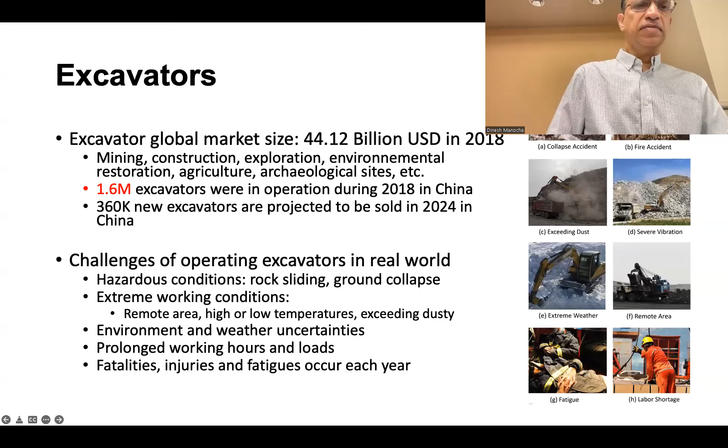So the notion of an autonomous excavator is not new. We were not the first ones to do it. There were at least previous systems. One of the earliest systems was at Carnegie Mellon at NREC way back in the late 90s. You can see the autonomous loading system. There's some really good work even at ETH. There's a lot of work on earth moving equipment. Moving stuff around is not a novel idea. It has been around for a while. We go from there. And there's a lot of work happening there.

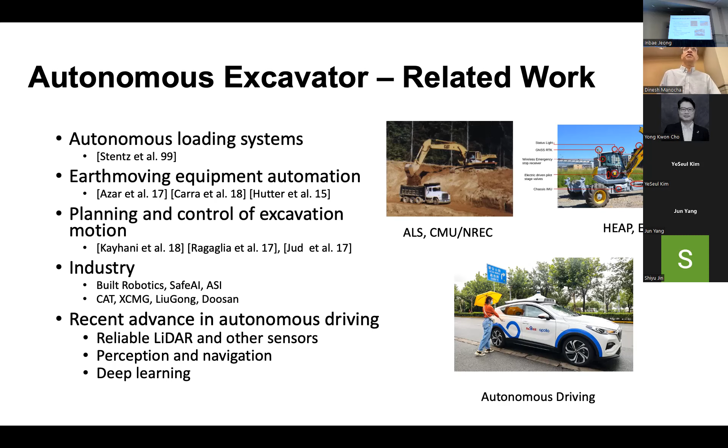I would say there's a lot of boost coming in the last decade because a lot of investment has gone into autonomous driving. If you see some recent media articles, the venture companies or the big firms have spent close to $15 billion. So as part of the autonomous driving industry, there have been a lot of developments in better LiDARs, better cameras, and of course, a lot of investment in perception and planning for navigation. So a lot of the technology invested in autonomous driving, we can leverage here and do well.

So this was a system that we put together. It's a large team at Baidu Research led by Liangjun himself. But you can see, you take an excavator and all kinds of sensing come in. There's a camera, there's a LiDAR, there's a pressure sensor, inclination sensors. And you have to make sure, when they're on heavy excavators, it's reliable. There's a lot of vibration, there's a lot of force being applied, and you go around.

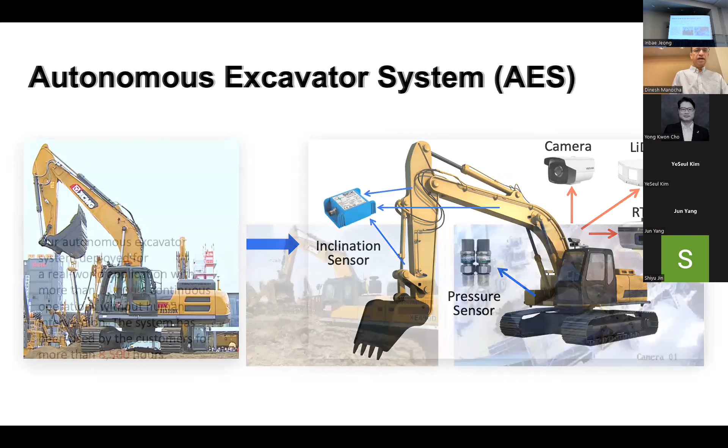As I said, the idea of excavation is not new, but the take-home message I want to give from this talk is that the real challenge in this work is actually integration. There's a lot of work on perception, planning, control. As an academic, I myself write a lot of papers on that, but what you don't realize is how do you make planning, perception, and control work together? And how do you reach a level of reliability?

There were hundreds and hundreds of engineering challenges solved, which I can't talk about in 15 minutes, and we could not put in the paper, but literally what this was able to demonstrate, which I hope was a big thing, is that the efficiency was close to human operation.

About 80, 90%, 95% getting better and better compared to humans. Robustness, it's operating—you saw a big, small video there, but this has actually been deployed in a site where it worked 24 hours nonstop. This is really 24 hours, not a staged thing. This particular user has used it for more than 8,500 hours. We hope this metric shows it can work 24 hours nonstop, achieving close to human-level efficiency. Humans are really good operators at how you do the thing and reach that goal. So this is really deployed, it's no longer a proof of concept, it's really being used and people are literally benefiting from it day to day.

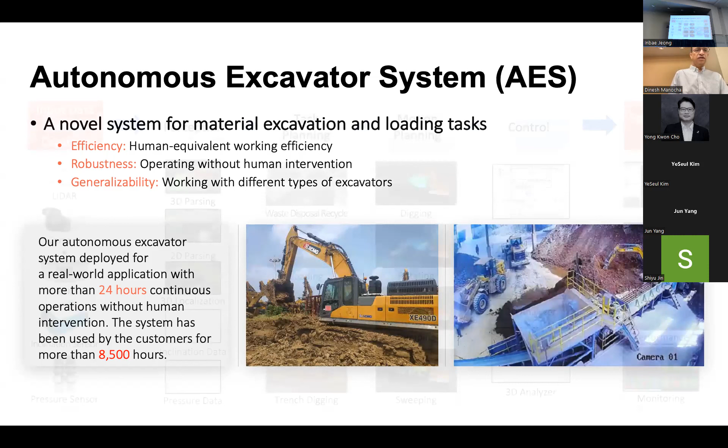So what are the components? Any of these autonomous systems, just like autonomous driving, has 3 big high-level parts: perception, planning, control. This pipeline is not new, it's been around. Now perception got a big boost from computer vision—last 10 years, deep learning has totally revolutionized it. Secondly, the number of sensors, the number of LiDARs and cameras coming around. So perception came to a big level here, and you can see the multiple sensors here.

In planning, we always talk about breaking it down into high-level and low-level planning. High level is task-level planning—you give high-level tasks, like an operator says I want to deal with loading, I want to deal with rock removal, trench digging, or waste disposal recycling. You take that high-level task and break it down into what we call classical robotic motion planning: a series of motion planning problems like digging, rotating, dumping, sweeping. So you can imagine building a low-level library of motion planning modules and a high-level task library.

And of course control—you have to have hydraulic motors or other mechanical parts, and they have to work at a really high level. Of course there were lots of challenges. You use as much open source software as possible, but a lot of software has to come together. I want to emphasize that level of integration was definitely non-trivial. This is the challenge every automation system faces, what every vendor of autonomous driving systems deals with—they've got a large team to work on and put it together.

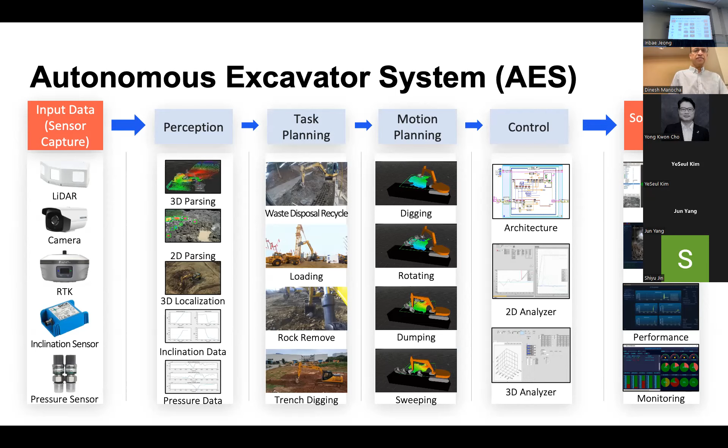Let me give you examples of the perception challenges we deal with, in the perception pipeline. When you're in a construction site, you're dealing with a lot of dust and rocks flying around. Even this projector looks hazy, but in a construction site the scene is always full of haze and dust. So we had to develop a new pipeline for what's called de-dusting, for lack of a better word. You see lots of papers in computer vision and robotics covering all kinds of perception, but there wasn't much work on de-dusting—not many people dealing with it. So we had to gather our own data and train our network to get it right.

What kind of material is it—is it hard soil, is it rock? That comes up in semantic segmentation: you'll see this is where the rock is, this is where the water is, this is where the grass is, and so on. And instance segmentation. Finally, for the actual operation where you pick up rocks, you have to figure out the 6-DOF pose estimation, what pose to take. This will become clearer in the pipeline.

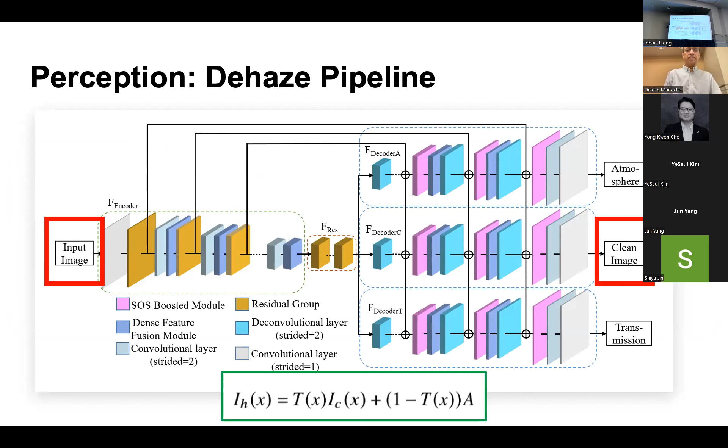I won't go into the details—it's in the paper—just a network showing the de-dusting pipeline, the dehazing or de-dusting. You give an input image and this whole pipeline of networks processes it. Let me show you how this works; I'll spare the network details for lack of time. But literally, this is how the input looks like—of course it looks even worse on the projector than it did on my laptop, so you can barely see anything.

So let me see if we can turn the lights off. Maybe slightly—the projector isn't very focused, I think. So we need a better focusing projector, deep learning in the projector right here, right? Can we turn the lights off by any chance? Anybody have luck on that?

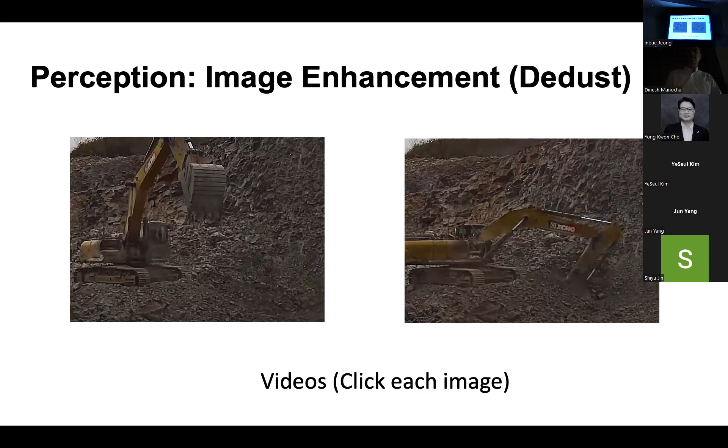Okay, so this is it. This is what I call the fuzzy version. You can see it's a little bit sharper with de-dusting, same thing on the right-hand side. This was one of the first perception modules. When we started working on this project three years ago, we did not expect this. This is one of the biggest challenges in the process, dealing with lots of fuzzy, flying dust, and how you deal with it. At the top are the dusty images, and on the bottom are the results of the network, de-dusting, for lack of a better word, or just better focus, so you can do better recognition on these things.

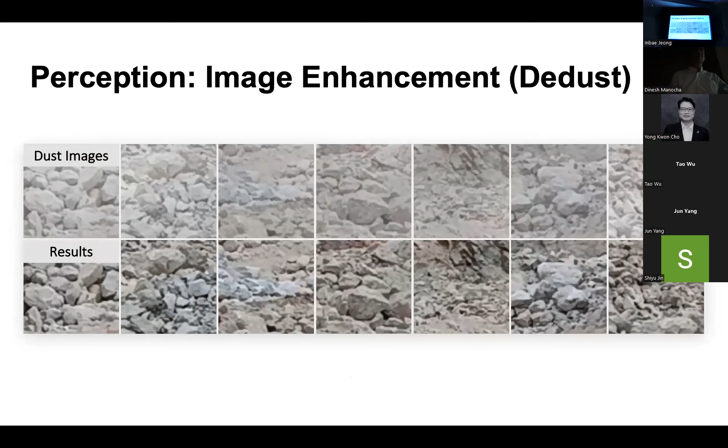Running segmentation on the top row would not work as well as segmentation on the bottom row right here.

Of course, to get the perception right, we have to build our own dataset, because deep learning only works well if you have good labeled data. We generated datasets taking into account 8 classes, from dry soil, wet soil, all the way to titanium and mixture. This isn't exclusive—you could have construction sites with more than 8 materials, but we can train it accordingly. This can definitely handle that.

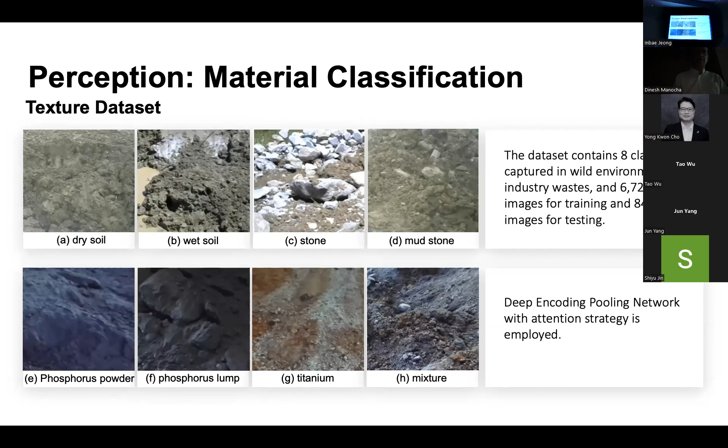To get a good dataset that works well, we took almost 6,700 images for training and 800 for testing, the typical breakdown in deep learning methods of 80-20 or 90-10 for testing and training, building a database. We found that using an attention strategy with a deep encoding network worked well, so we got pretty good results once the database was there and the network was trained.

And I said the other part was segmentation. Last but not least, you've got big stones, big items to lift—how do you deal with them? You figure out the pose of the stone. If you see a large rock, how do you go about it? Humans can figure out how to put the manipulator at the head end, but in this case...

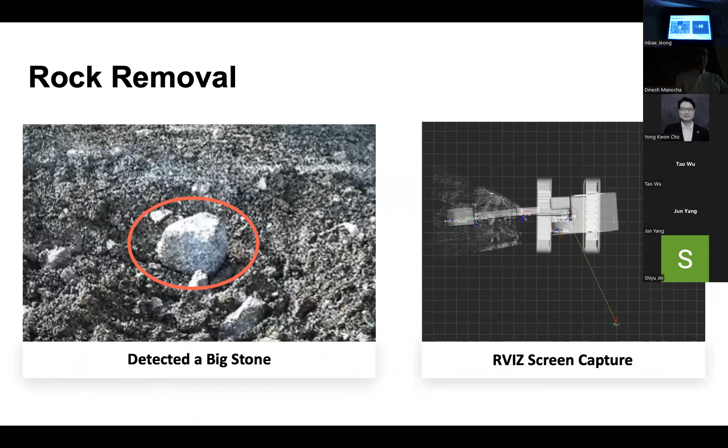Everything has been done automatically. This is just an example of how rock removal works—you detect it, and you'll see how the excavator comes and literally lifts it up. This is automatically done to figure out the whole pose, what angle it should come at, what force it should come down with, and lift it up. So this is kind of the operation.

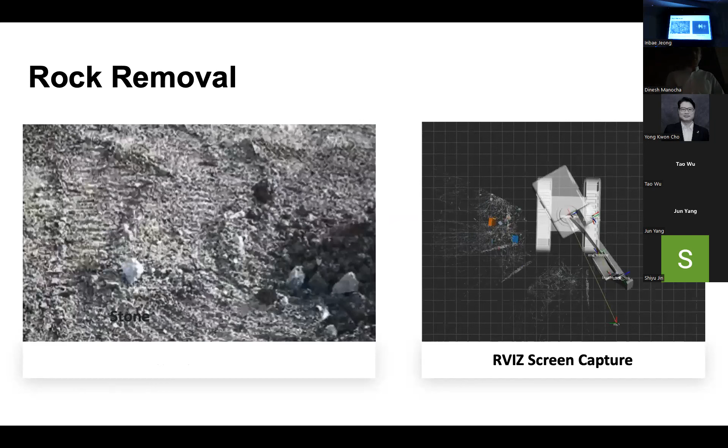On the left was the actual simulation, the actual excavator. On the right-hand side, you see the screen capture from the actual system.

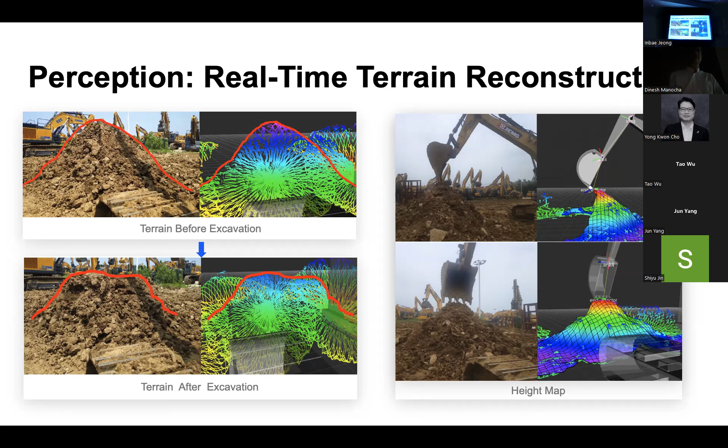This is it. As we heard this morning, on a construction site things change every half hour, right? It's 24/7 operation, digging going around. So if you're running an excavator for 24 hours doing a big waste disposal job, the terrain is changing very frequently. So you need what's called real-time terrain reconstruction, which typically vision people don't do. But construction has this challenge—the site you're operating on changes very frequently, as mentioned by the morning speaker—so you need real-time capabilities for doing this computation.

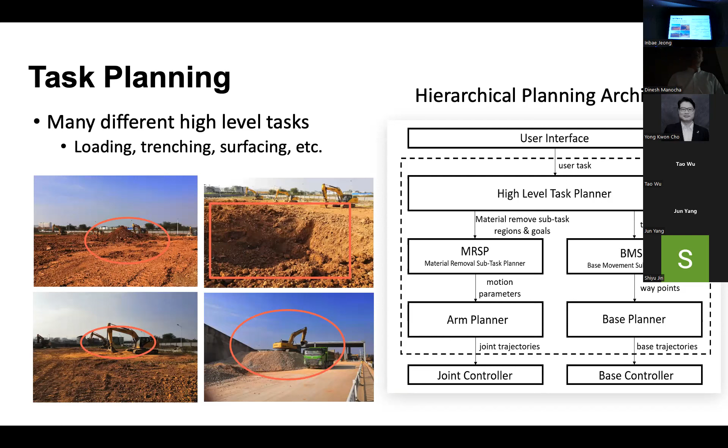This high-level task planning and low-level motion planning—the hierarchical planner we put together, what you see on the right-hand side, took a lot of components together. These are well-known techniques like MRSP based on material removal, and BMSP, a sampling-based planner. This whole planner was put together by taking a lot of technology that the robotics community developed over the last 40 years and putting it together here. Especially for the low-level planning, we use optimization-based planning, which has been around.

There was earlier work on CHOMP and STOMP. My own group at UNC did a lot of work on ITOMP. There are a whole bunch of planners, optimization methods, and we specialize it here to see what comes up.

Optimization cost depends on making sure it respects joint limits, takes into account collision cost, and final goal state cost, and makes sure there's no collision. So you set up an optimization function, following a gradient descent method. In this case, we use what is called stochastic optimization.

Of course, the optimization method is susceptible to how good an initial guess you take. So if the initial trajectory is good, you basically get good convergence. In this case, we know the task we're doing, so we're able to optimize that.

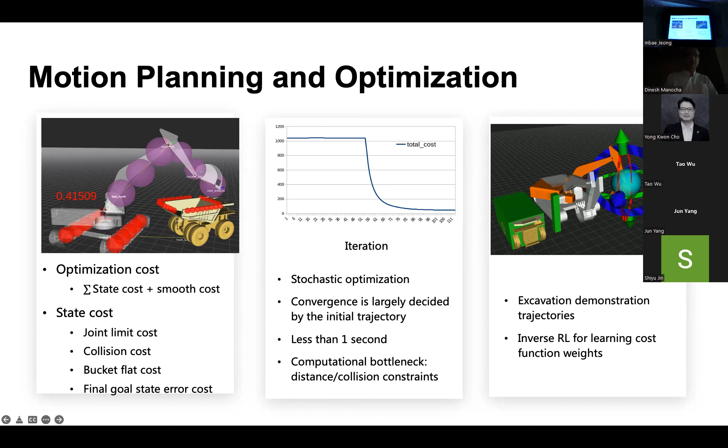The good thing is it's pretty real time, at least it's getting fast. It was not the biggest bottleneck, though of course you can always make it faster. So this is the thing, but this is exactly what you'll see.

On the left, you see the excavator with a human operating it. You can see in slow motion how it opens up the head and literally digs it up. On the right-hand side is our autonomous system working in real time automatically, getting close to human efficiency. Of course, humans are humans, but the automation system is getting there.

Overall, we got pretty close to human efficiency, and our goal is that as you deploy it more, it gets better. It'll be good to compare the nodes in five years. Could we do better than a human, right? Especially if you're operating for 8 hours. This is going to be a nice automation versus human performance comparison, though we don't have to get into that kind of a race, but we're getting pretty close to it already.

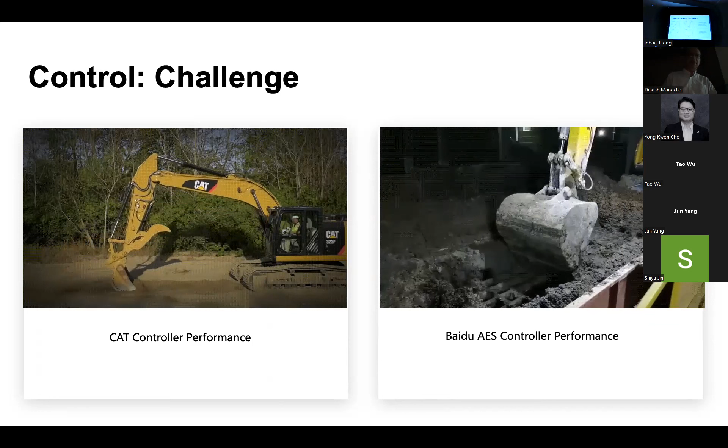Now, here are some trajectory controllers. In the controller, the big challenge was there are different kinds of excavators, light and heavy. You don't need to worry about that part.

The motion control in the hydraulic actuator was a very big challenge. I won't go into details, but a lot of effort was done to make sure the controller can follow the planned trajectory to about 10 centimeter accuracy. This is a pretty big scale, and getting this kind of accuracy on this system was non-trivial.

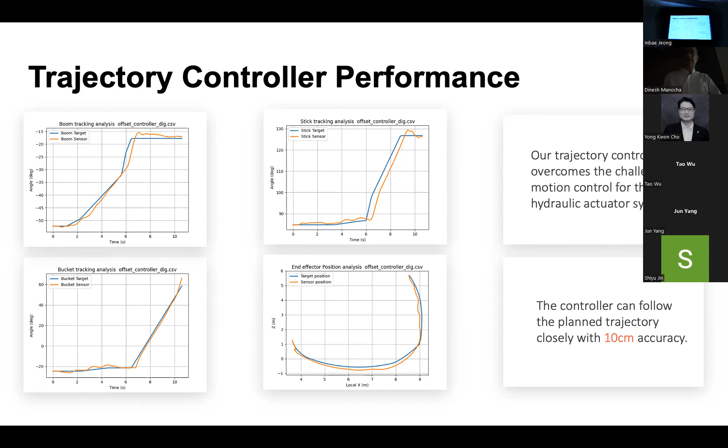I want to emphasize again, I'm going over the perception, planning, both task-level and motion planning, and controller quite quickly. But within each of these, there were lots and lots of problems. This was a very large team of people working, some in the research lab, some on site, to make it work. So this was definitely a good result at the end, but there was a lot of effort to make it work well. Let me show you how the system works, because the proof is there.

Before I get into that, we've done some extension of this work. Recently, one of the students, Tianrui Guan, has been working on it. The paper will appear in RSS at the end of next month in New York. So this was that particular excavator system we developed and presented in Science Robotics, sitting in an area doing its work.

But we also want to walk in the terrain. So how do you do terrain analysis? Is the terrain traversable? There could be water, there could be rain, there could be some spaces the excavator isn't good to go into, and the navigation needs to handle that. So we went to the next level, doing terrain analysis in a larger area with mapping, navigation, and planning. This is a system called TNS, presented next month.

The paper's on the web, but you can see it's a real-time traversability estimation system. Real-time because terrain is changing, the construction site is changing, you can't do it offline. Real-time brings a lot of challenges for an estimation system.

So there's planning, mapping the area, planning and navigation. They developed new traversability methods for complex terrain. Terrain traversability is a pretty well-studied problem in vision, but we had to really customize new methods for these kinds of applications, since they were not done in these environments before. And again, we integrate this with planning and control.

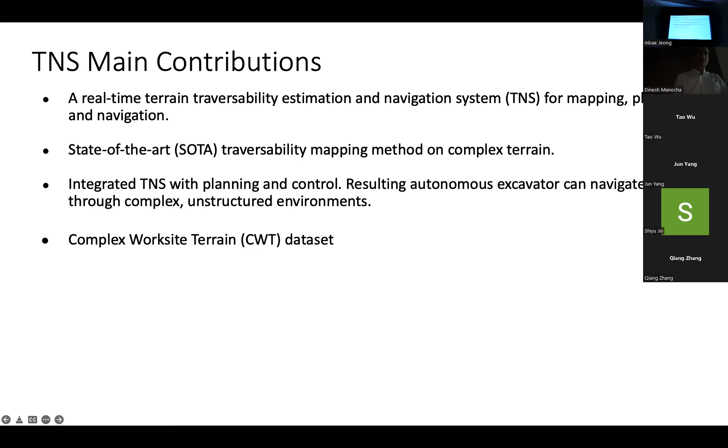And of course, there's also a complex terrain data set. The data set we had to do, again, just like we did the previous data set for dedusting. So Tianrui did this work on terrain data set collection, which is on the web now, hopefully. You got 30 minutes of video with a human operating and close to about 669 RGB images. Now, 669 is not considered a big data set in computer vision nowadays,

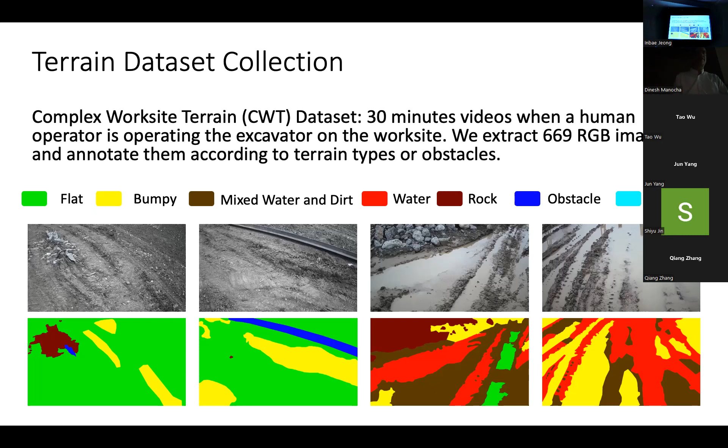but getting data sets from real sites is not easy. You have to go there and collect and label it. And again, you can see you have data which is flat, shown in green, yellow is bumpy, all the way to water in red, rock, obstacle, excavator. So you can see we have about 7 classifications here. This is what we found in our system, and that's what we deployed right here, which is helpful.

Here's the perception pipeline of the whole terrain traversability and segmentation. Because of lack of time, I will not go into details, but the paper is on the web. And if you attend RSS, you can hear Tianrui's talk there. And this is the planning stuff. The perception module is right here, the traversability map computed using a deep learning network. And then it goes to tracking, control, navigation, how the system comes together.

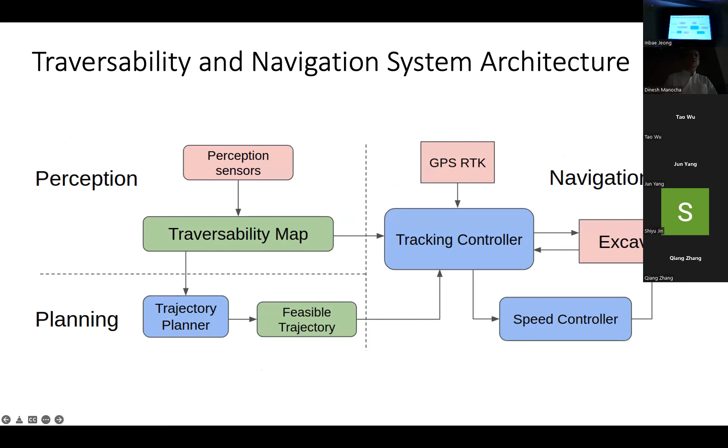So this on the left is again the perception part, traversability. On the right-hand part, as you do the traversability map computation, you've got to run the module in real time. So you'll see the RGB images, semantic segmentation. You also get the colored point cloud, a traversability map. They all come together. Again, my apologies for going over the stuff very quickly, but I want to show you where things are going. So this is trying to show how it's been deployed.

So I want to spend the last couple of minutes on learning what makes it work and what challenges come up. Real challenges come up, as I said: doing it in your lab is one thing, but this is going to remote sites. A lot of excavators are used on construction sites. There's a lot of interest in using them for mining applications. There's a lot of work in mining on developing autonomous vehicles which transport the material around. So the challenge here was different kinds of weather and terrain conditions.

It could be a cloudy day or sunny day. The perception methods might change, right? So you see dry soil, wet soil, big rock capture, bottom left rainy weather, small rock excavation, and wet soil. So these are at least some scenarios we tested, and I'm sure this is not exhaustive. We go from here.

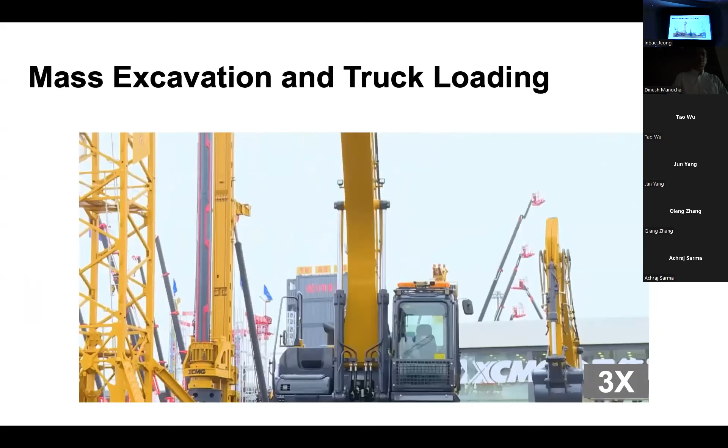This video was also shown this morning by the first presenter. You can see it operating right here, and this was totally automatic. There's no teleoperation here. This is literally working, loading, and you can see it's picking, and it also figures out the pose of the truck, goes and gathers the dirt, and goes and dumps the dirt or sand. That's what literally happens. So all these components of perception, planning, control come together quite well.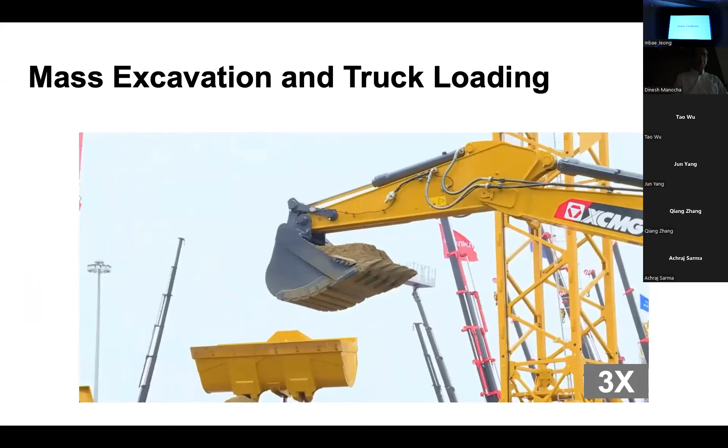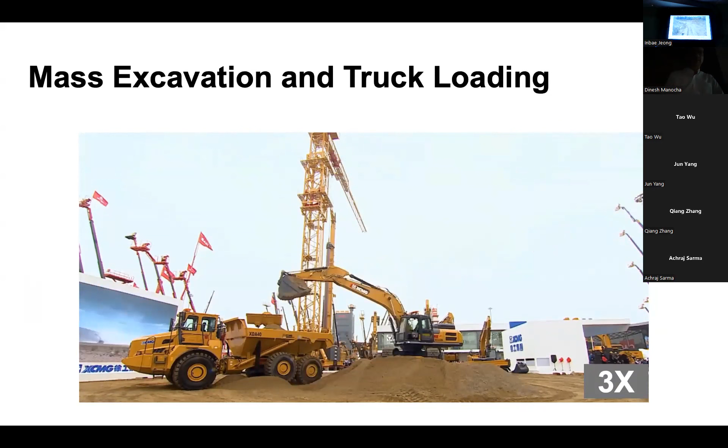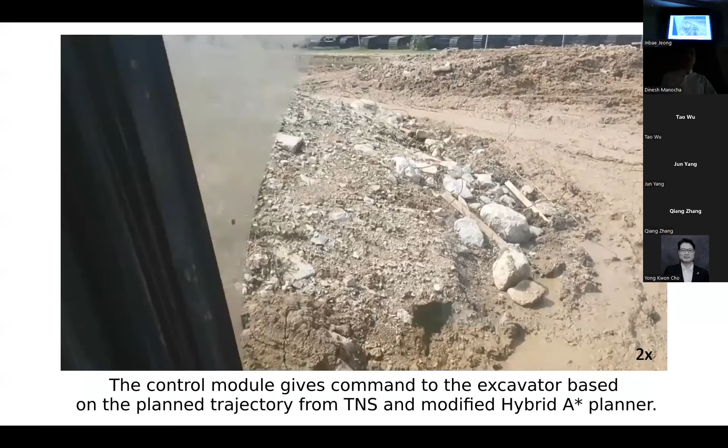And then the last part, the TNS part, navigation, you'll see right here. So literally, this is a control command, and this is a view from the excavator. It's doing autonomous navigation. And again, you can see this is not the most friendly place to navigate. We all see autonomous driving. We see beautiful videos from Waymo, Cruise. Those are beautifully nice maps, San Francisco roads. Life is always flat and good. This is not your friendly place to navigate, right? Most of us don't navigate excavators here.

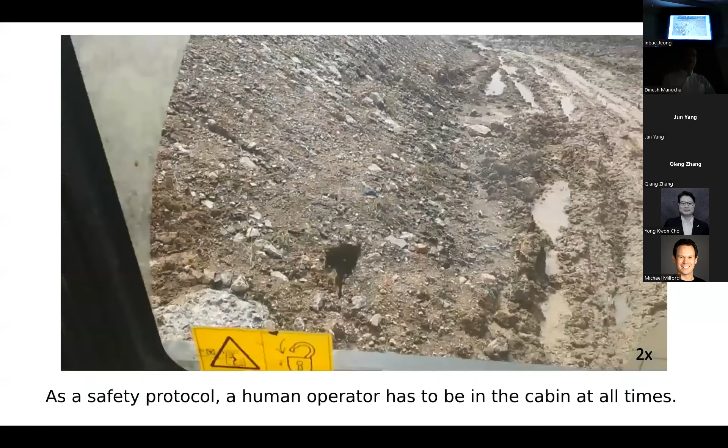But of course, as you do initial testing, we have a safety protocol, and we're testing right here. But let me show this to you. This is using the TNS system, terrain traversability and mapping, going around with the Hybrid A* planner right here. So this is it. One of the applications was actually deployment in waste disposal recycling.

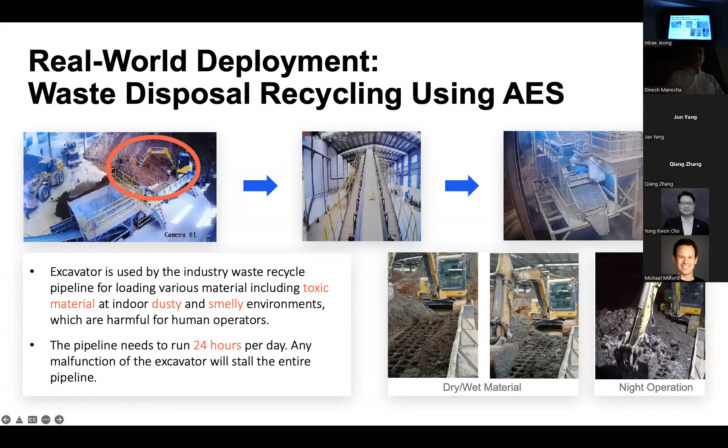It's a waste site using AES, and literally it's an industrial waste site, which consists of toxic material and is dusty. So this was literally a site which is not safe for human operators. And this is where we deployed and tested for 24 hours. I'll show you the video right here.

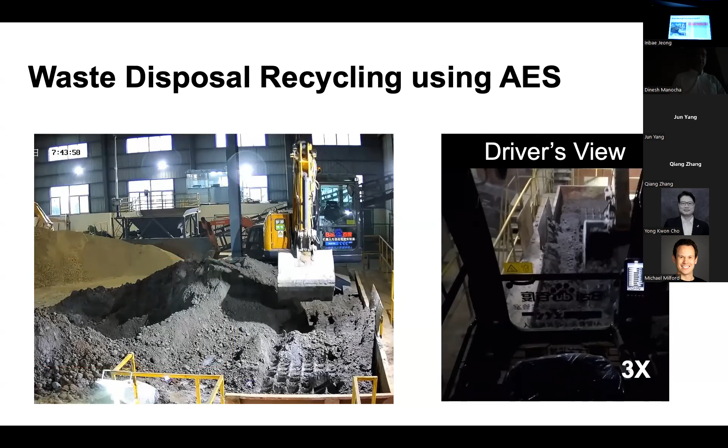So this is literally happening for 24 hours. And you can see, again, waste site disposal. This is where different components come up here: running time, efficiency. And as I said, we really measured it compared to humans, and it was getting close to 95 to 100% efficiency. It's getting close to human operation.

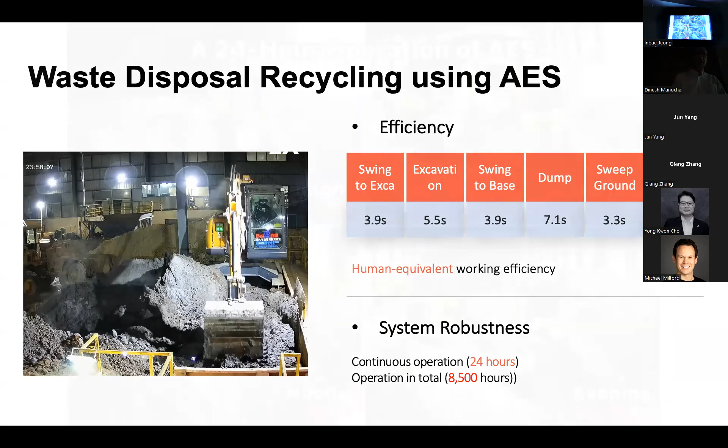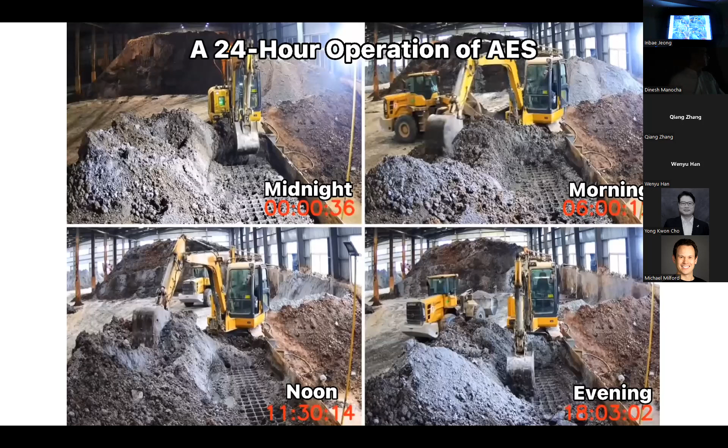And here's a final video which literally shows you that it worked for 24 hours. So we had cameras here, see, at midnight, operating at 12 o'clock. This is around 6 a.m. in the morning, around noon, and around evening. This literally went on for 24 hours, and you can also see how the dust and all the toxic material got changed because it was operating and doing quite well.

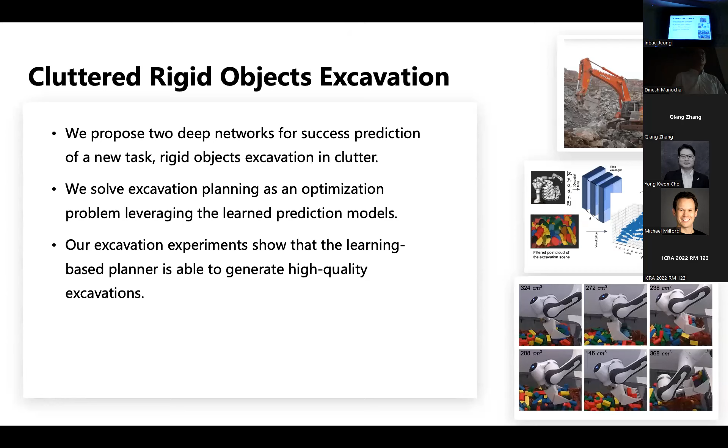So last but not least, as you go into working with clutter and rigid object excavation, a lot of times you deal with excavation at very tough sites. So this is by no means a complete piece of work. There are lots of places excavators are used, especially in mining. More and more cases are being deployed.

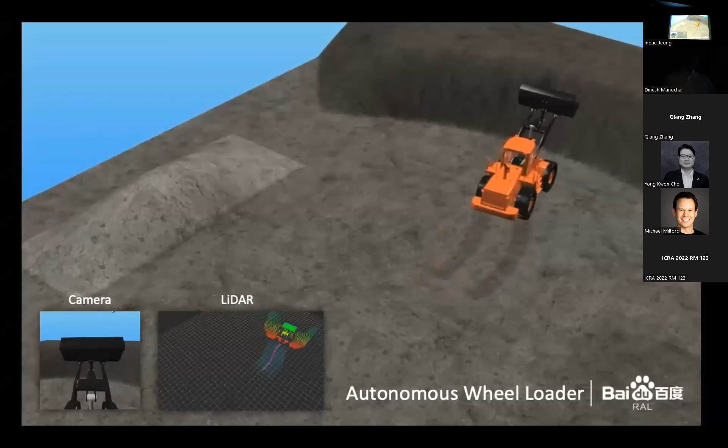And one thing we're also trying to work on is an autonomous wheel loader. That's the next system. So this is just a simulation of that. Ultimately, what people want to see is that we got the basic excavation, we got the traversability mapping and navigation system, but you literally want to go and load at this site. So this is the autonomous wheel loader here, and this is just in a simulation. You'll see how it goes around.

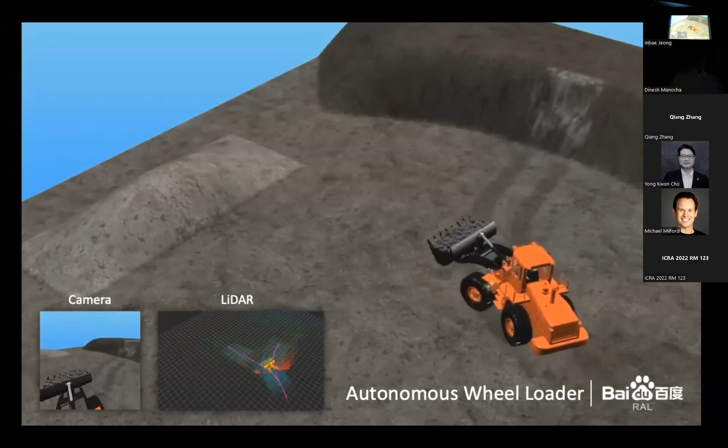There's definitely been a lot of deployment. We're hearing from a lot of our partners and collaborators. There's a lot of deployment of vehicles, autonomous trucks, millions of miles to move things around. But you can imagine these autonomous trucks and autonomous excavation together doing large amounts of jobs, especially in the mining industry and some kinds of construction industry, where it has huge potential.

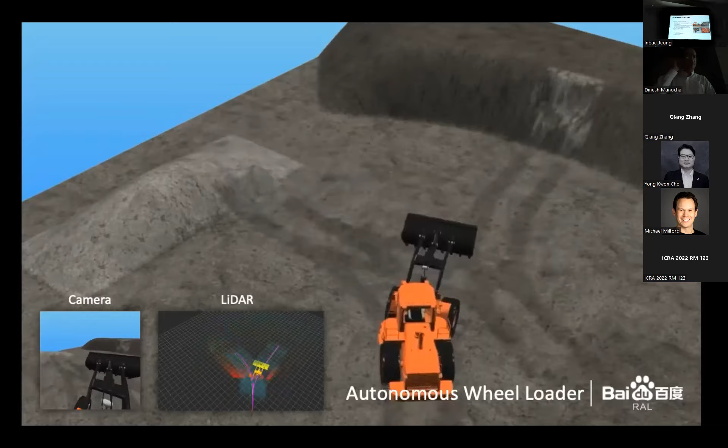So I think I'm beyond my time. To conclude, we hope we demonstrated to you, this was a big team effort on building an autonomous excavation system. We could show close to 24-hour non-stop operation, but a lot of effort went into reaching the 24-hour reliability, and it's been deployed for 8,500 hours. And as I said, this is just a start. There are just so many challenges. We can have lots of teams, a lot of people work on a lot of PhD problems right here.

There are different kinds of excavators, right? They're lightweight, heavyweight, wheel loaders, cranes, shovels. We haven't done all of them. We've just done some of them. You have to take into account the dynamics. You've got to wire them. There are more challenging situations. A lot of the mining industry people deal with environments which are not a nice, beautiful, sunny day in Philadelphia. It's a very challenging environment. So how do you really deploy it there?

And of course, someday, we're going to have a lot of excavators. One of the challenges coming up in industry is economic: there are lots of excavators being deployed. They're pretty heavy equipment, the big ones, right? Now, people come and ask us, can you automate it? You can't just take your own Camry at home and make it autonomous, even if autonomous cars will solve the problem. So these excavators have a lifetime. Can we automate them? That's a whole new challenge. But meanwhile, we hope that we have shown this is possible, it's being deployed, and hopefully this will only get better. Thank you very much.

Do we have time for any questions?